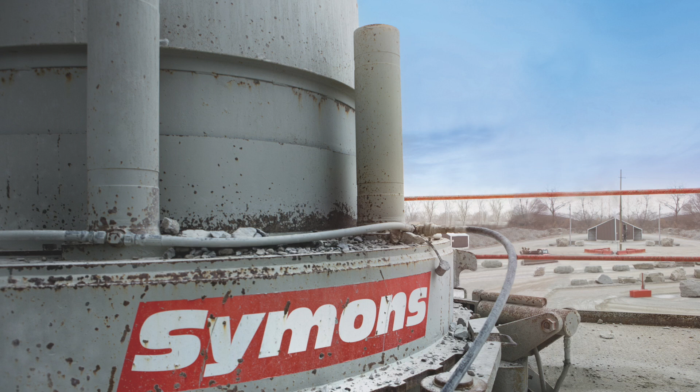Invented more than a century ago, the Symons cone crusher revolutionized crushing as aggregate producers knew it. The man behind that industry-changing development was none other than Edgar B. Symons. Born in Sheridan, Indiana in 1871, Symons was gifted with a mechanical mind that he applied to a variety of crushing advancements in the early part of the 20th century.

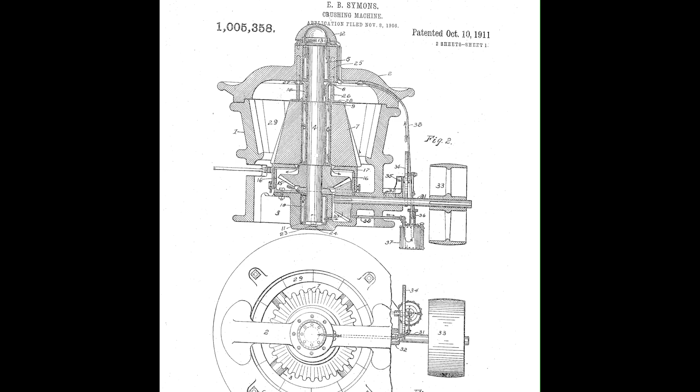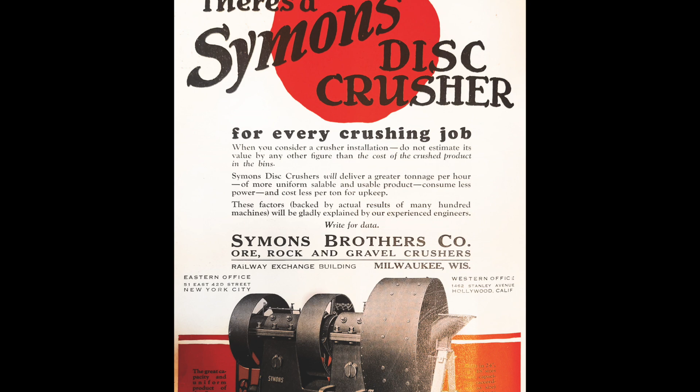Symons reportedly developed the pillar shaft gyratory crusher in 1907 while at Smith & Post, a predecessor company to Smith Engineering. Four years later, he brought forth another development in the horizontal disc crusher. Around this time, the crusher pioneer teamed with two brothers to form a family business around his craft, calling it Symons Brothers Company. It was there that Symons' signature cone emerged, setting the stage for the modern crushing industry.

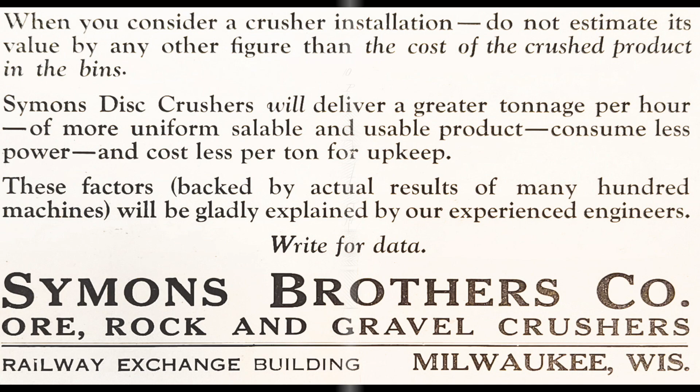While brother J.E. Symons was the manufacturer executive and W.M. Symons was the master salesman, Edgar B. Symons was the inventor, who provided the family business the foundation from which it could grow.

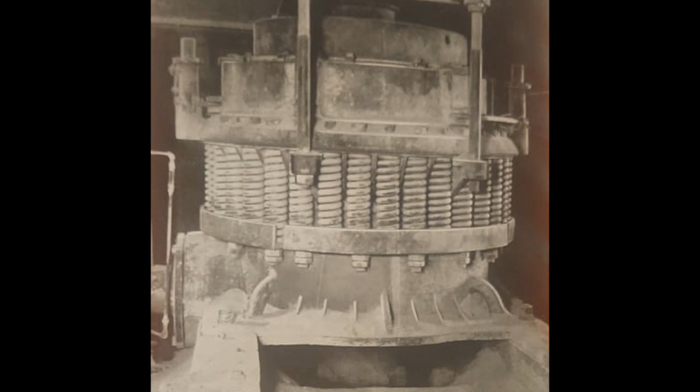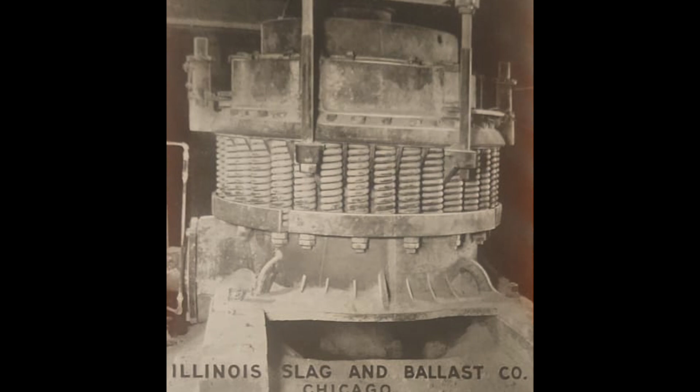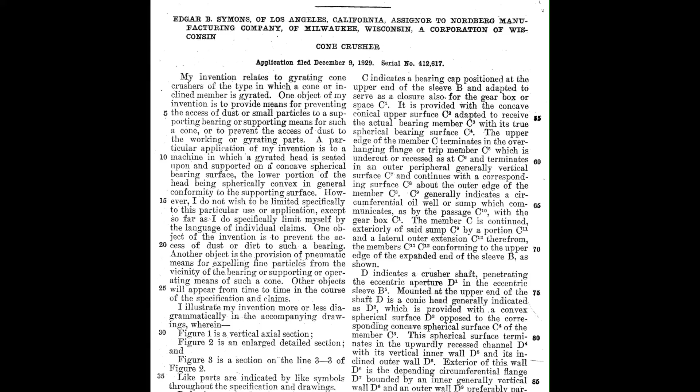The Symons vertical disc crusher surfaced at Symons Brothers Company in the family business's early years. Still, seemingly always striving for a better crush, Symons set his sights on a unique model that, in his own words, featured a gyrated head that was seated and supported on concave spherical bearing surfaces, with the lower portion of the head spherically convex in general conformity to the supporting surface.

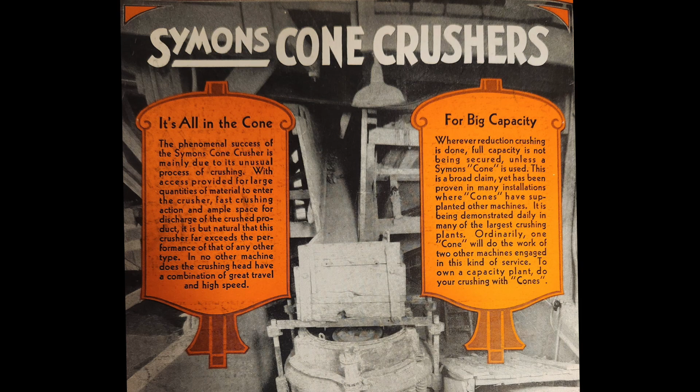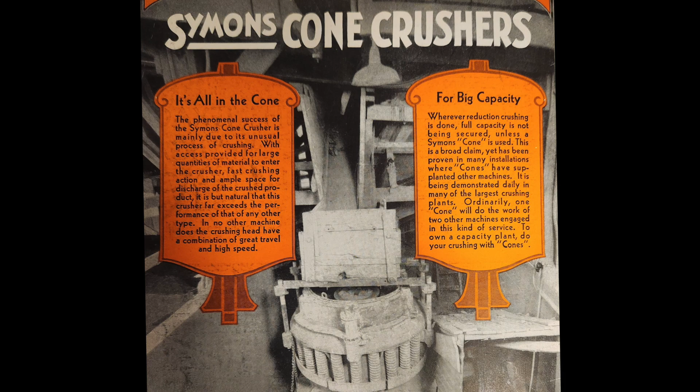The description, written in a Symons patent, was of the Symons cone crusher, which Edgar B. Symons invented in 1923. Symons' cone proved to be reliable, efficient, and cost-effective to the producers of the day, crushing a range of materials in aggregates and mining, both in the U.S. and around the world.

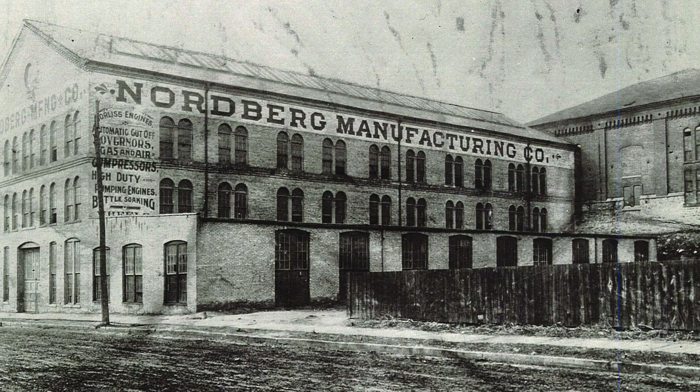The Symons cone did not remain with the Symons Brothers Company for long, though, as within a few years' time, it became the property of the Nordberg Manufacturing Company. To its credit, Nordberg was successful in extending the reach of the Symons cone to heights Symons Brothers Company hadn't previously realized.

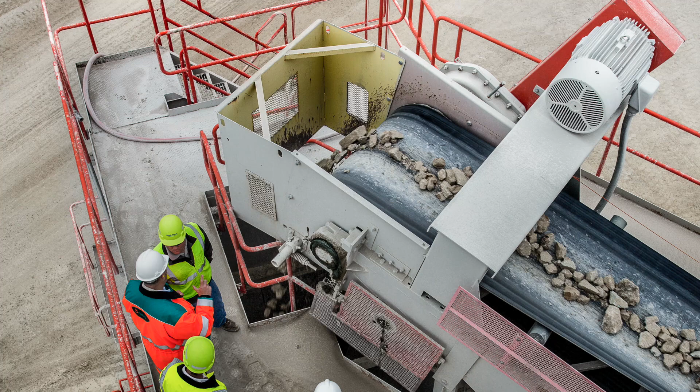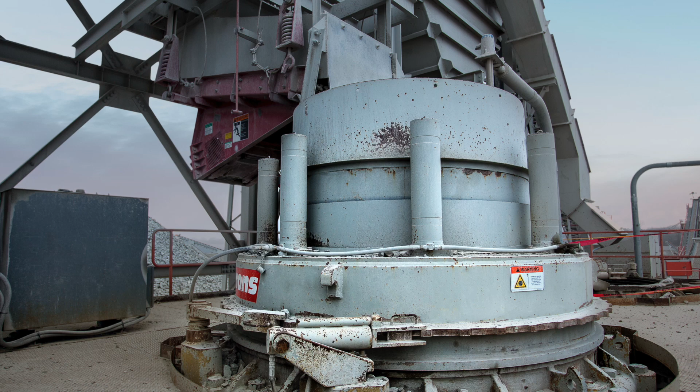Characterized by one modern-day crushing specialist as a piece of art, the Symons cone wasn't quite the perfect piece of equipment when it surfaced. Regardless, the cone improved the crushing capabilities of producers everywhere, and its design was refined in the years and decades that followed, both by Symons himself and others who championed the brand.

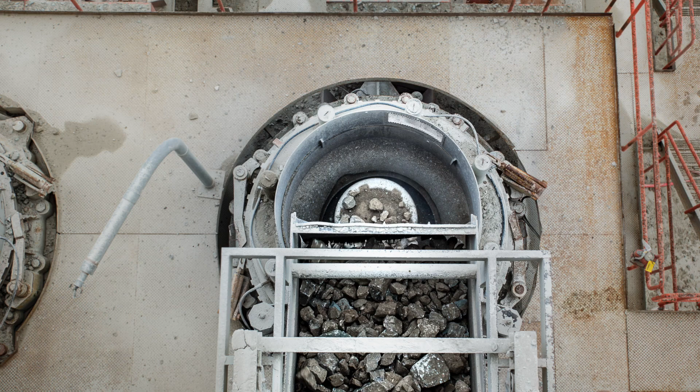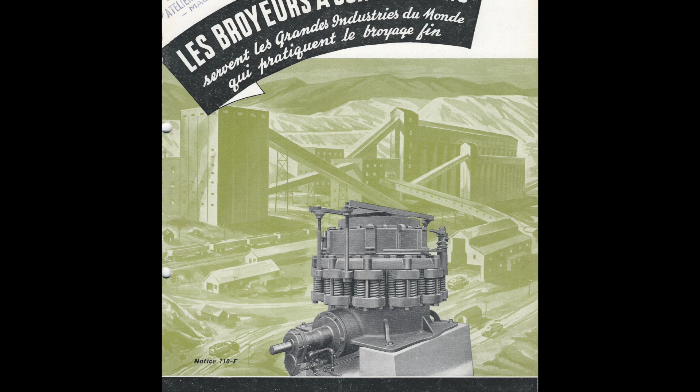As another modern-day crushing specialist says of Edgar B. Symons, he designed the machine. In crushing, everybody has experienced a Symons. It's the most prolific crusher out there.